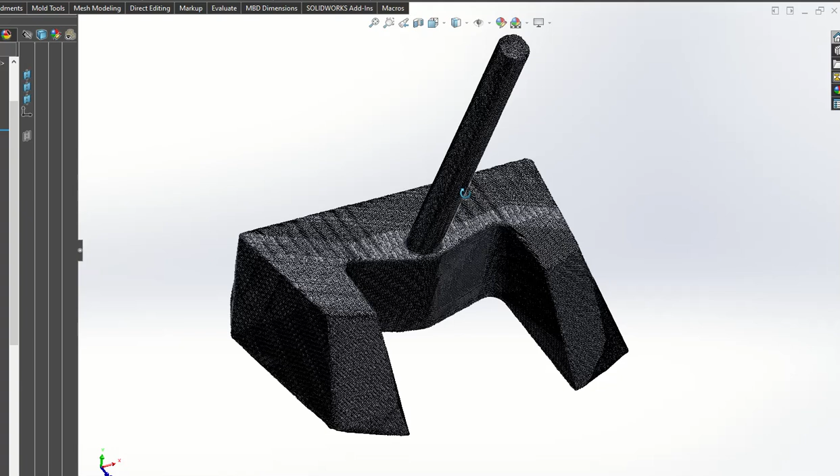So here, what you're seeing on the screen is a golf club of some sort that we've already 3D scanned, and we've imported this into SolidWorks. We have the scan data in SolidWorks, and what we're going to do is reverse engineer this and build this geometry so we can get a CAD file for machining, molding, thermal forming, or sheet metal stamping - whatever the manufacturing process may end up being.

We're going to create that CAD file so that it's capable of actually being manufactured. So what I have on the screen here is the actual graphic from the 3D scan. This is dimensionally accurate.

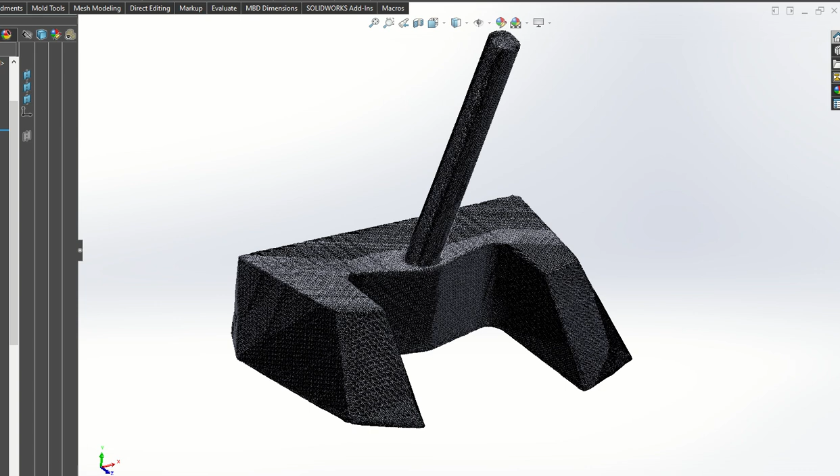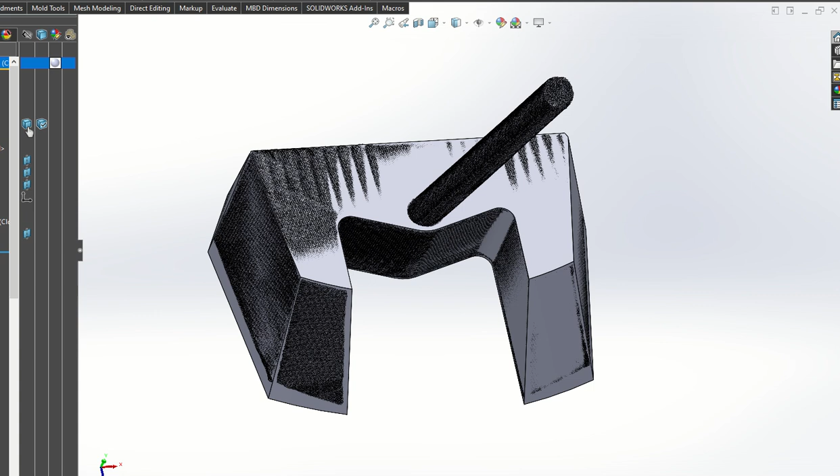What we're going to do here is I'll show you how we rebuild this. So what I just did there is turn on the feature - we created a lofted feature here with some basic guide curves and geometry. You can see I'll turn the actual solid body a specific color so that you can see the difference between the scan data and the actual reverse engineered part.

So now what you're seeing is the red part is the designed part that we are creating - it's the reverse engineered design - and the gray area or blackish area is the scan data.

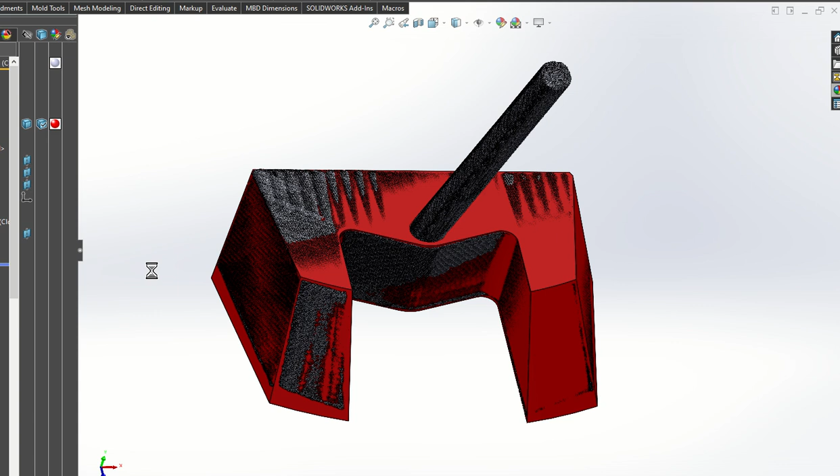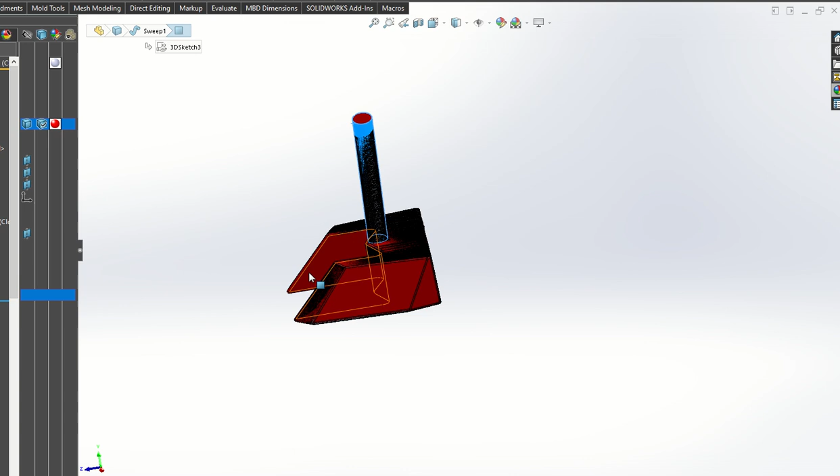So what we're going to do next is clean up this surface, then add some rounded edges - you can see these edges became round. We're going to create this rod that's the shaft of the golf club, and you can see we're getting pretty close. One thing we look for is the more surfaces we can see as we zoom in and zoom out, the closer we're getting with the data.

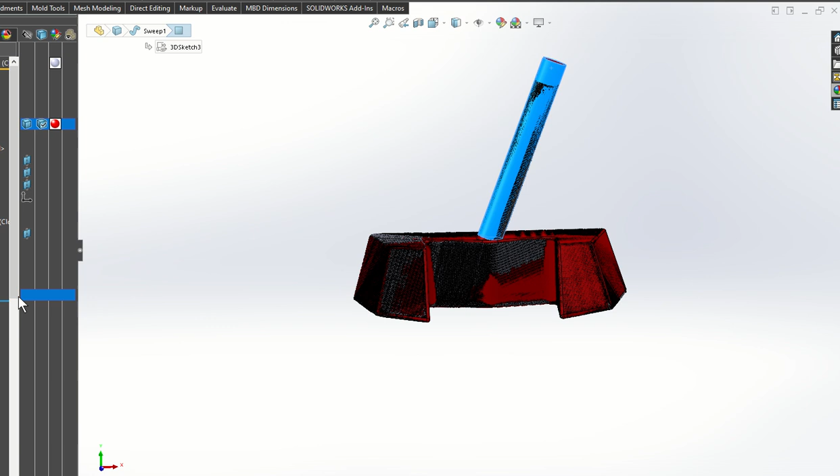With our scan data being metrology grade, we capture a lot of detail. So if this club has been used, it could be bent, dented, or deformed in some way. We capture that in our scanning process, and we smooth that out - we work around that stuff as we're designing.

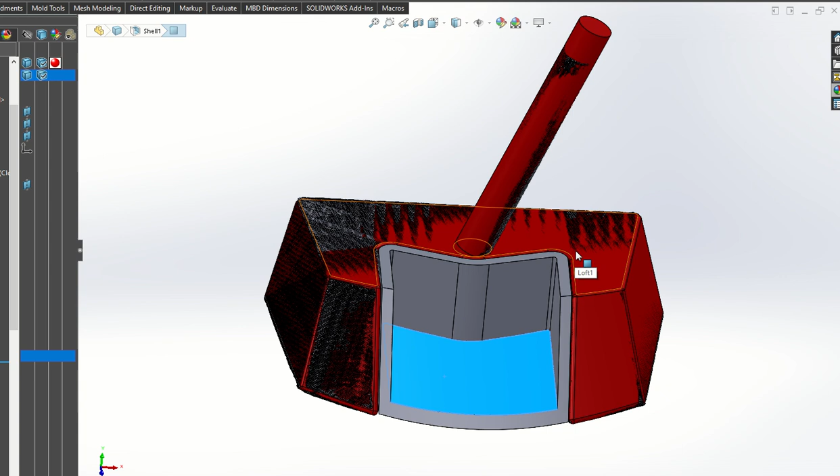So here, what we are creating now is the part we want to build around. As I pull these features down, you'll start to see this gray part is what we're actually going after. The red part is just something we created to be able to redesign so that we can build this gray part. The gray part is actually a scoop for this golf club.

And you can see as we're going forward, we are starting to create a few more geometries. Eventually, what you're seeing is we're creating a clip for this gray part that's going to clip around the shaft of the golf club.

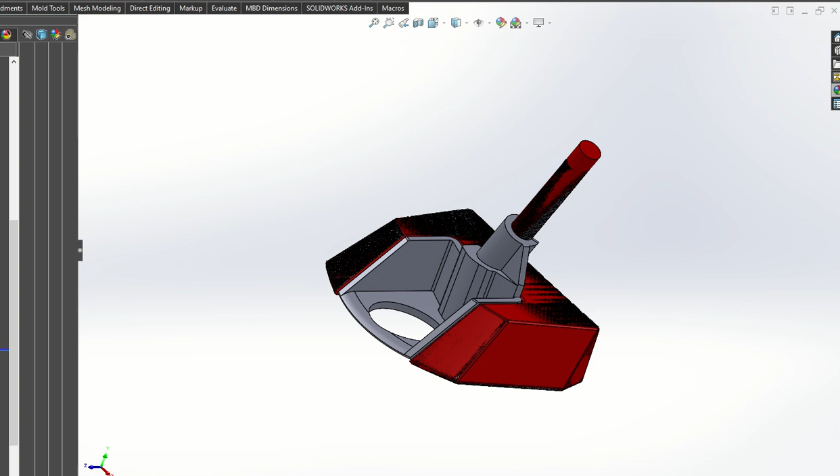And then we're going to 3D print this so we can test it. The last part is adding some fillets, rounding everything, making it look nice. Then we remove it so you can see the actual reverse engineered club again, and we'll bring it back so you can see how everything clips together.

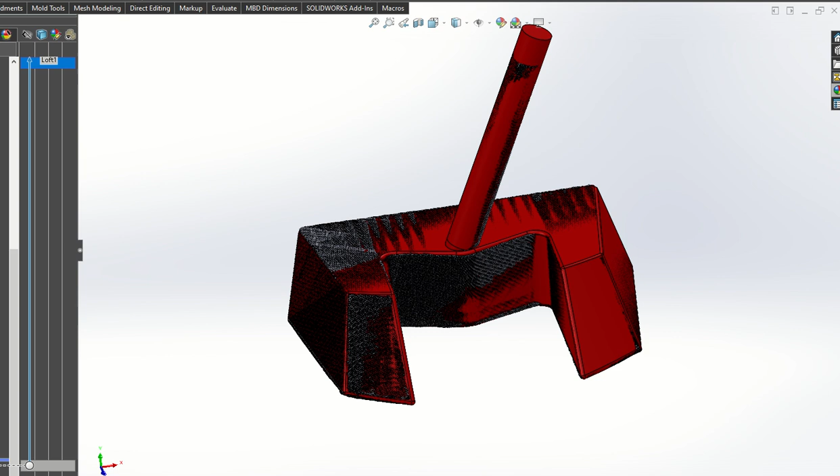So what you're seeing here is this part, and this was tested. We 3D printed this and snapped it onto the actual club. It worked perfectly - stays in place, and it works exactly the way it's supposed to.

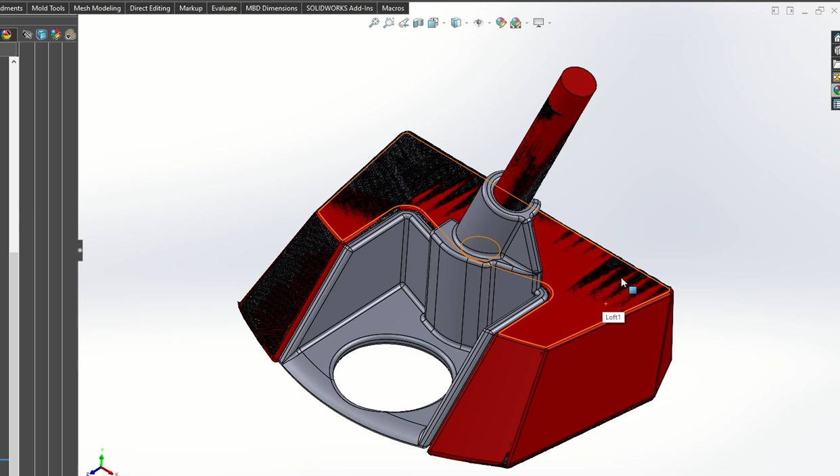So this, again, is a very quick version of how we reverse engineer parts and products and create parts and products. But the important part here is you can see that we actually use the scan data.

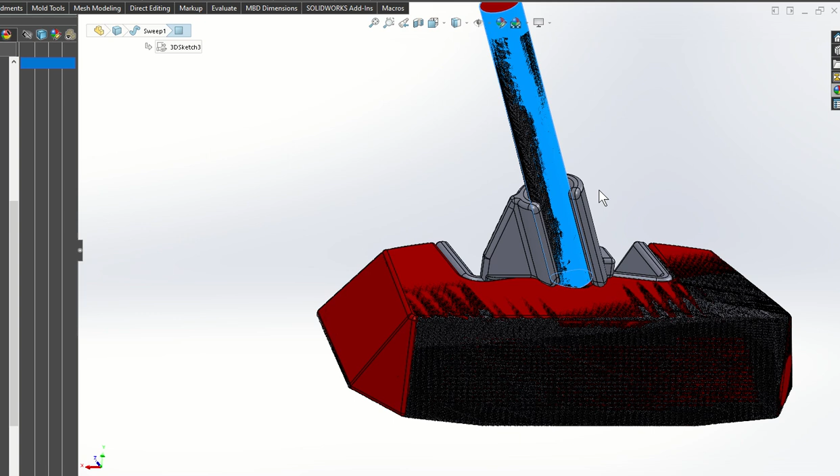If we had to try to guess what this angle of the shaft is using a protractor or some other measuring device, taking stencils with cardboard, or taking a picture - I've seen people take pictures and import them into SolidWorks, and that can work. It's a bit of a guess, but it does kind of work.

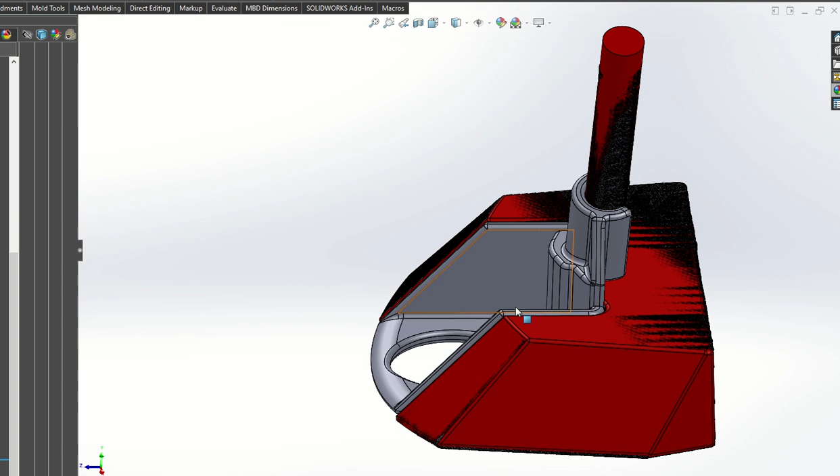But we don't guess. We actually reverse engineer things based on actual CAD data, and we do that with our 3D scanning process, then bring that into SolidWorks so we can reverse engineer the actual dimensions and check things. Along the way, we also take calipers and do physical measurements with micrometers and pin gauges, and we physically check and compare scan data to physical parts so things line up on the first try.

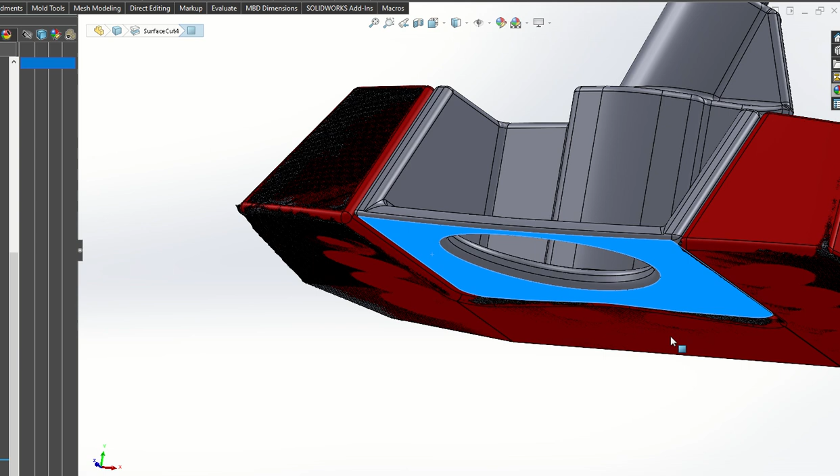With this gray part, we 3D printed it and it came out almost perfect the first time. We made a small adjustment down here to make sure this surface continued to be higher than this surface. Other than that, everything looked good.

So that's the reverse engineering process, and we can do this with things as small as a dime or as large as 8 feet by 8 feet by 8 feet. Our 3D scanners are able to capture that size of part and anywhere in between. From there, we bring it into SolidWorks and start building around it, or build something to the exact shape that we scanned.

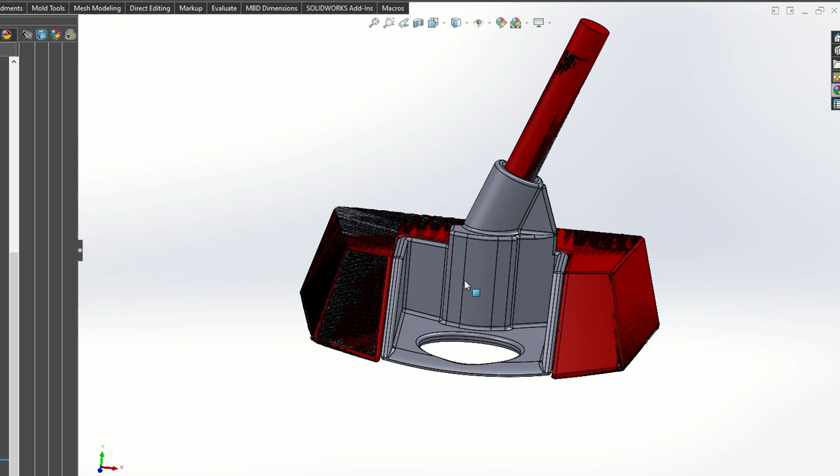So again, this is our reverse engineering process. If you or someone you know is looking for reverse engineering, look us up - we can 3D scan it and provide you the 3D scan data. If you can't, don't want to, or don't have the ability to, we would do it here: reverse engineer the part and create step files, Parasolid files, IGES files - anything that can be imported into professional manufacturing software.